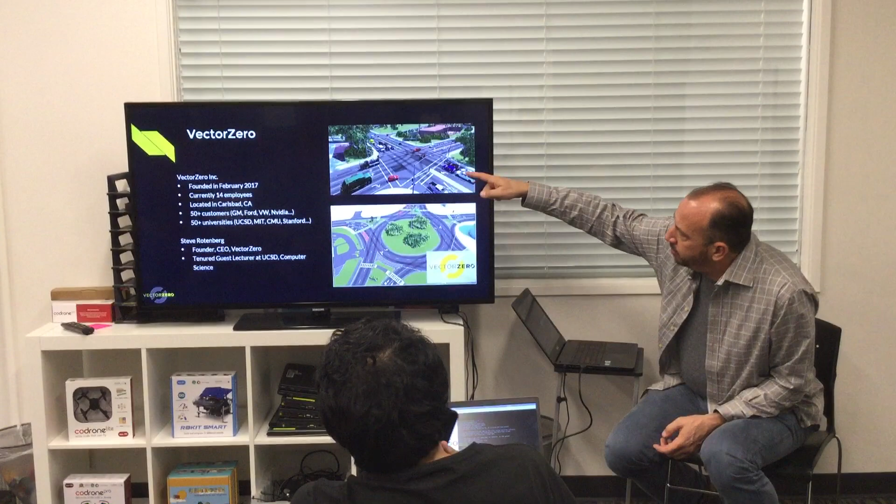So everyone in that field has come to the conclusion that simulation is going to play a huge role in this. The makers of autonomous vehicles, some of the folks we talk to, are setting up clouds of tens of thousands of CPUs running 24 hours a day, rerunning the same tests over and over and running various simulations. Several companies in the last few years have started up to address this. We're one of them, but we've taken a pretty unique approach. Instead of focusing on the simulation side, we focused on the modeling side, the preparation of the environments, and it turns out that's something no one else has put much emphasis on.

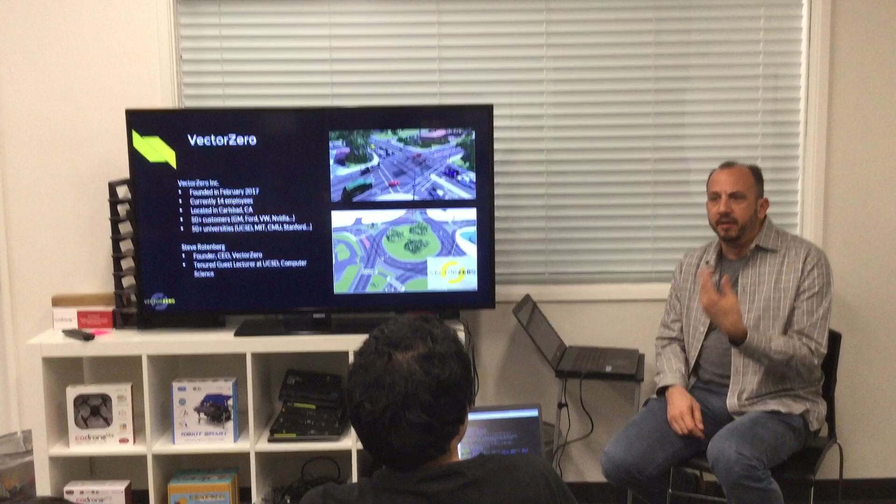In just the year and a half since we released our software, we've become the standard product that everyone is now using to build roads, to build the actual road environment. We make a piece of software that allows you to interactively build scenes like these and set them up for simulation. We started the company in February 2017, so it's not even 3 years old. We have 14 employees currently, based in Carlsbad. We now have over 50 customers in the autonomous space, including 12 or 13 of the major automakers like Ford, General Motors, Daimler, Toyota, and Honda. It also includes several big hardware companies like NVIDIA, Samsung, and Intel, all customers. There are also over 50 universities now using our software. Incidentally, I teach at UCSD as a guest lecturer, teaching computer animation programming and a physics simulation class.

These pictures show some of the output of our software, and you can build a scene like this in a couple of hours, probably. Something like this might take 3-4 hours for somebody who knows what they're doing. Our main product is called RoadRunner. It's an interactive tool that you can fire up and run, click with the mouse, and build 3D scenes for rapid road modeling and creation of the environment. It's got a very intuitive user interface, designed for ease of use, pretty powerful in terms of editing, and runs on Windows and Linux.

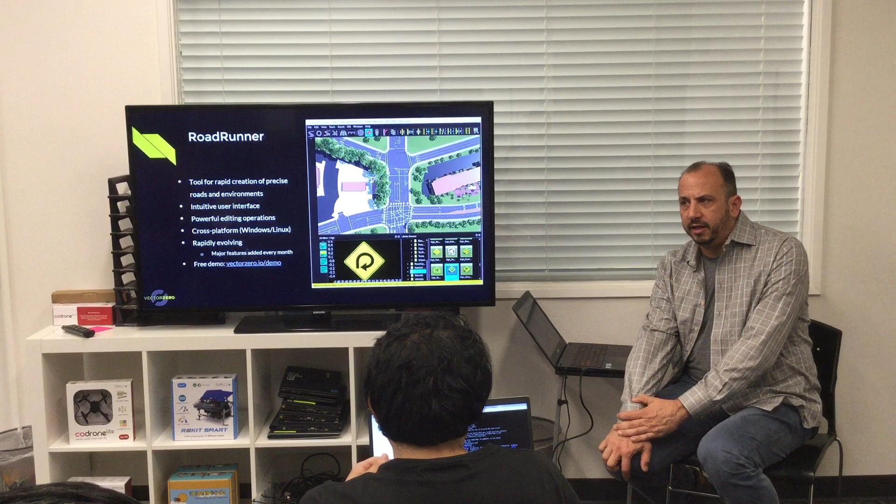We find that more than half of our customers use Linux at this point. A lot of the automotive companies are big Linux users. The tool itself is evolving a lot, and there's a free demo version available if anyone wants to check it out. The professional version is a little more expensive, but we can arrange things if you're doing experiments or research.

So internally we have a road model representation that allows us to represent very complex situations. It's designed from the start to handle very complex road networks, because we know that a simple 90-degree intersection in a four-way is going to get old quick, so we designed it with these kind of worst case scenarios in mind.

This is an actual real location: 1, 2, 3, 4, 5 little roundabouts arranged in one giant roundabout. This is in Swindon, England. Believe it or not, it's actually a real place, and there's another one similar to this in England somewhere. I don't know why they do it, I think they're just showing off. It's not even a very big town, and I don't know why they need an intersection that complex there, but it's pretty famous.

But anyway, we can not only build a 3D textured model for rendering, but the model we build has all the semantic information about where roads are, where lanes are, and where stopping points are, so it's actually a simulation-ready model.

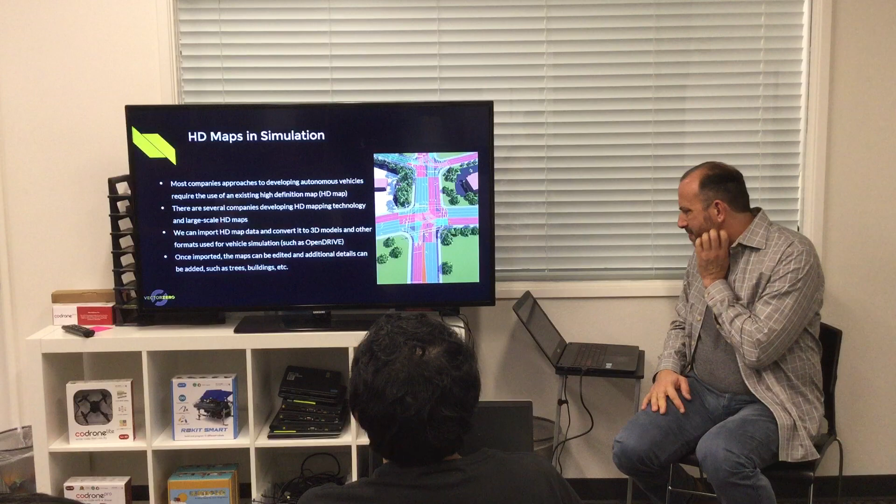Let me quickly show a video that shows some of our editing stuff, to give a live view of it here. I might skip over some of this, but I'll talk over some of it. So this shows again, it's an interactive tool designed very much to click with the mouse.

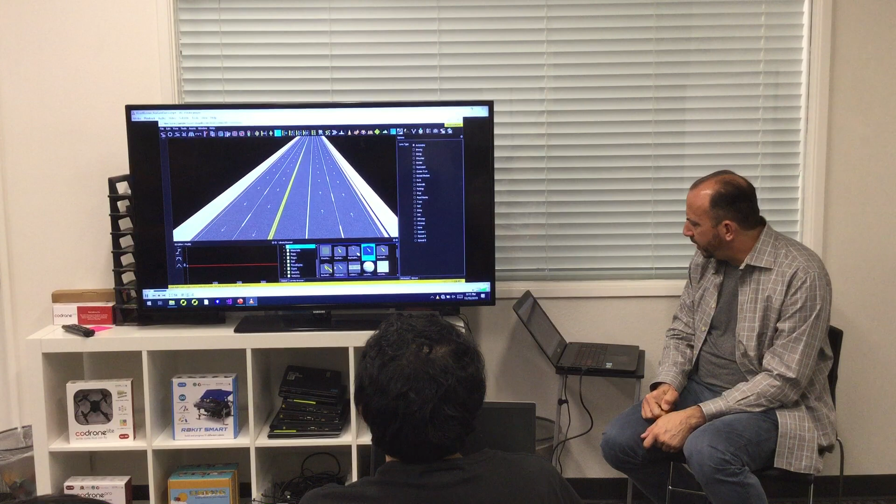There's a road editing mode where we lay out the main shape of the road. We can then go in and add individual lanes. Lane markings can be added, and lane markings can all be customized, so you can create little assets for lane marking types and customize the dash spacing, the size, the color of the markings, etc.

Everything is set up to do international roads, so it's nothing US specific - you can create your own library of road marking styles.

So you see here adding turning lanes, carving in different lanes. We can change the markings on any span independently. This is called a slip lane here, a turning lane. I've got some tools for adjusting corners. The video doesn't show much in the way of roundabouts, but shows some basic roundabout-like capabilities.

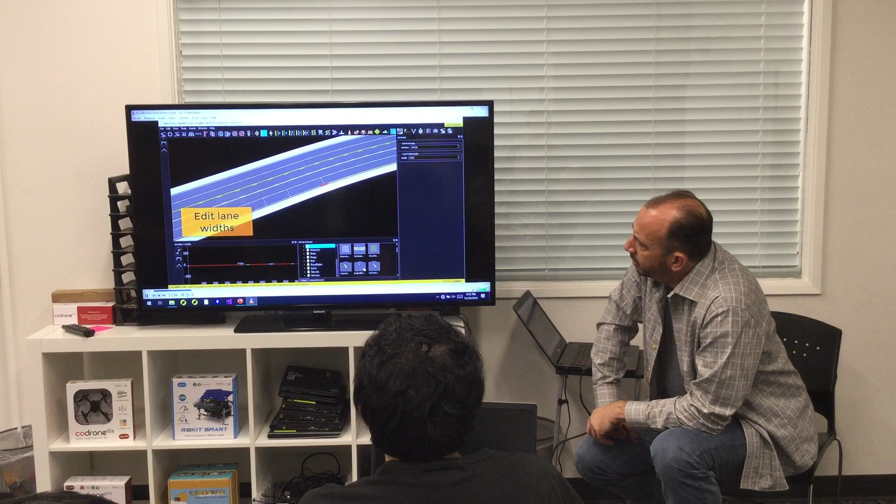The whole road is completely editable, so you can add these width markers at any point and make adjustments as fine scale or as coarse scale as you want. This one shows lane widths - as you adjust this one it maintains the same width if you want, or you can set it to not add on the width, so just different controls over that.

We have control over the cross section of the road, so you can control banking, crossfall, and the shape of the road. This system is going to undergo some improvements, but you can set key points along the road and adjust the cross section or blend between them. So you have control over all the curvature underlying the road. Real roads have very specific curvature requirements in how they're designed.

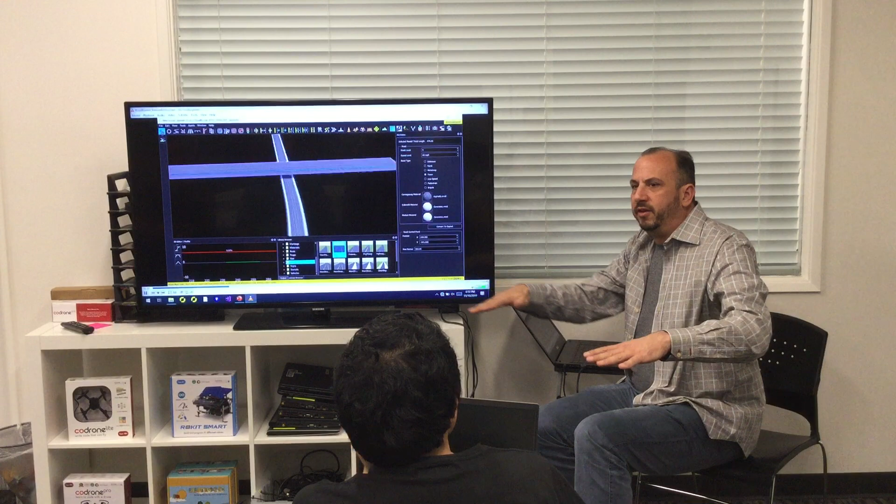We control the vertical heights of the roads as well, and the vertical shape of the road is based on the same types of curves and engineering principles that real roads are designed with. Obviously no one's going to build a real road like this, but the types of curves we use are all based on actual road curves. So the horizontal, top-down view is designed independent of the vertical profile of the road.

This is showing some of the bridge capabilities. We're doing some improvements here, so we have more control over intersections on bridges - we don't have good control of that right now. We're adding tunnels and better bridge control.

Posts, things like this can be brought in, customized and adjusted.

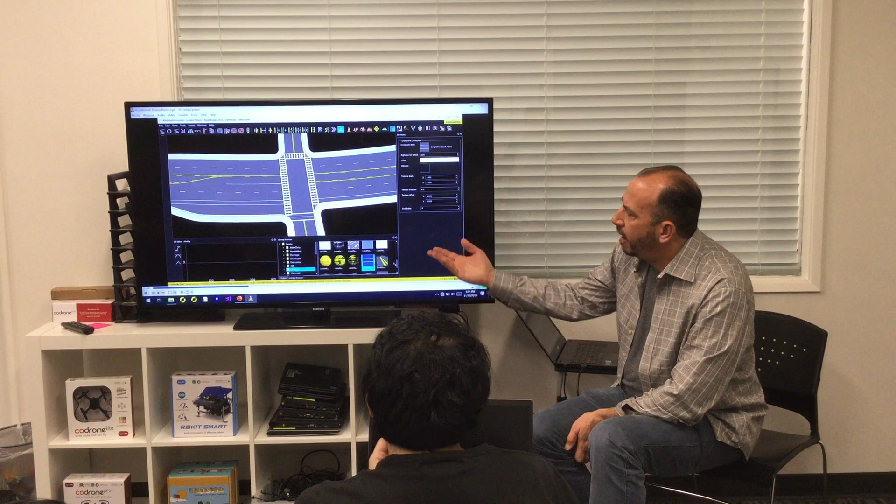And this shows the level of control over road markings - different types of marking, crosswalks. Again these are all based on styles, so you can create your own library of crosswalk styles and adjust the dash sizes, the colors, etc.

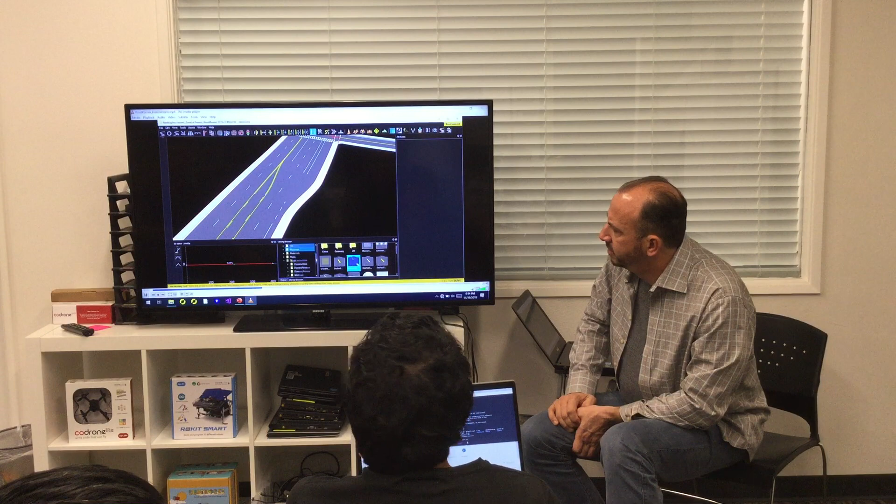These are a bunch of stencils we can place on the road. They're just SVG files, but they could be image files or bitmaps as well. It's not too hard to find the proper SVG shapes for all these, since the U.S. Department of Transportation publishes files that have all that.

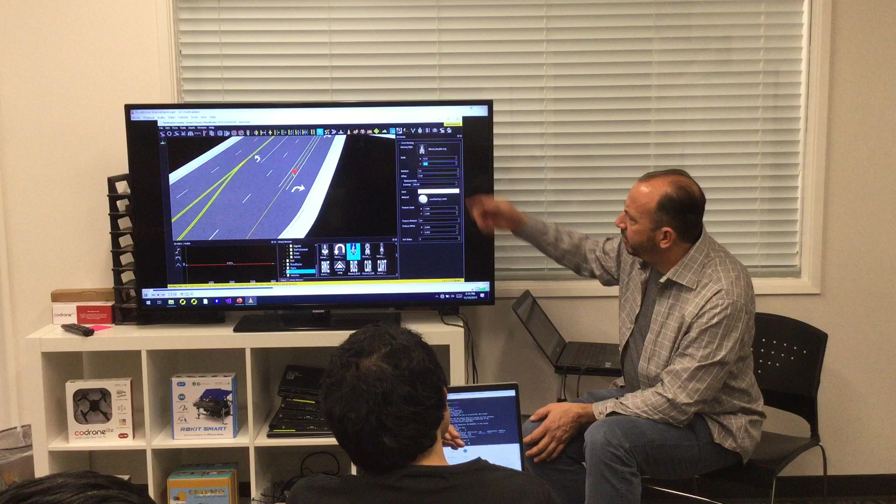You saw a second ago control over materials, so we can make the paint look faded. If people want to use this to test computer vision algorithms, they sometimes want to verify that the car will drive on if the paint is all chipped up. We can add things like dirt and cracks and more visual features if desired.

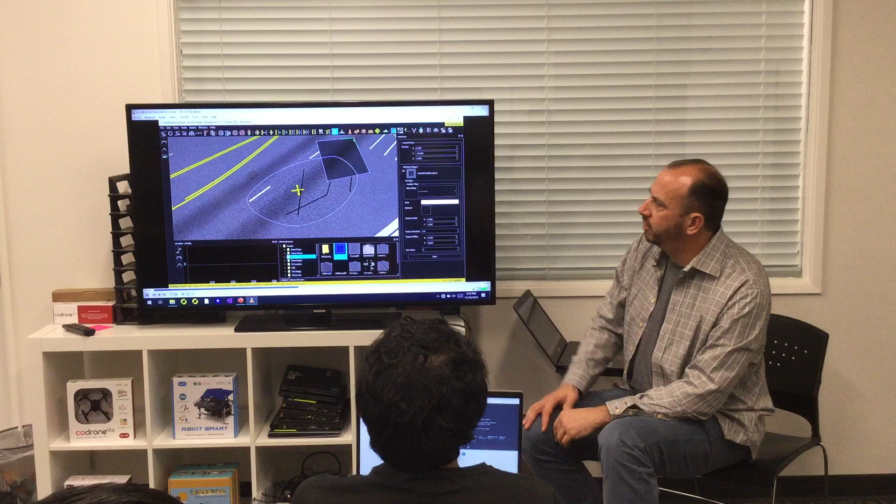A fairly small number of our customers really care about high quality visuals. Most of the customers use the software for creating road networks for path planning simulation, not so much for perception simulation, if that makes sense. I can get into that detail more if you're interested. A lot of our customers care about having a road network with the lanes and geometry set up. They tend to be, at least currently, less concerned about these finer scale visual features because, like I said, fewer people are doing perception simulation with it.

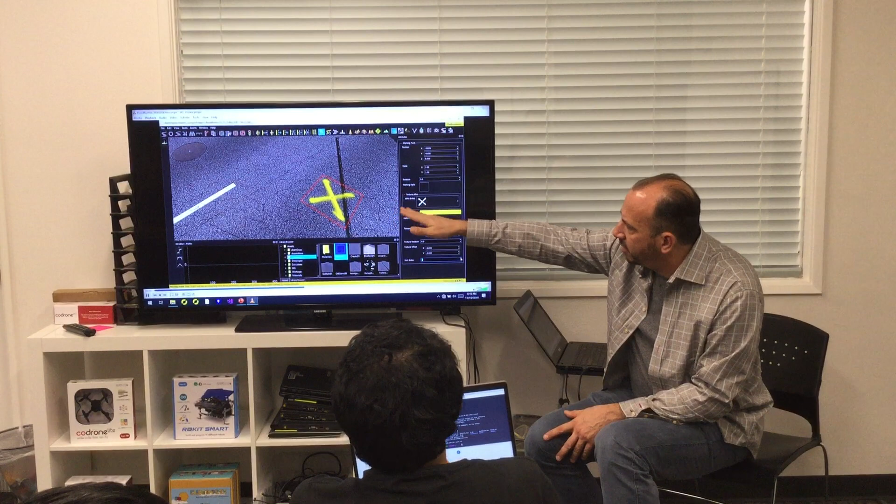But this shows how we can control all these other layered things on the road, and we can control what's drawing on top of what. So pretty detailed control of markings and stuff.

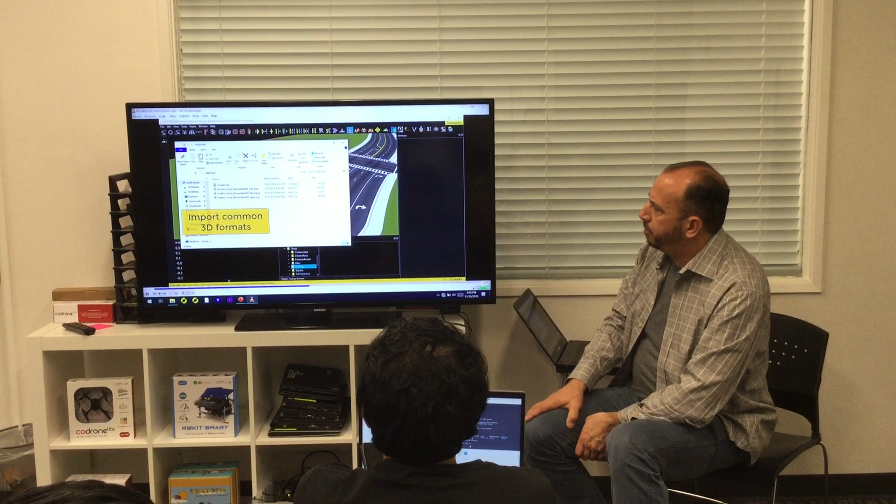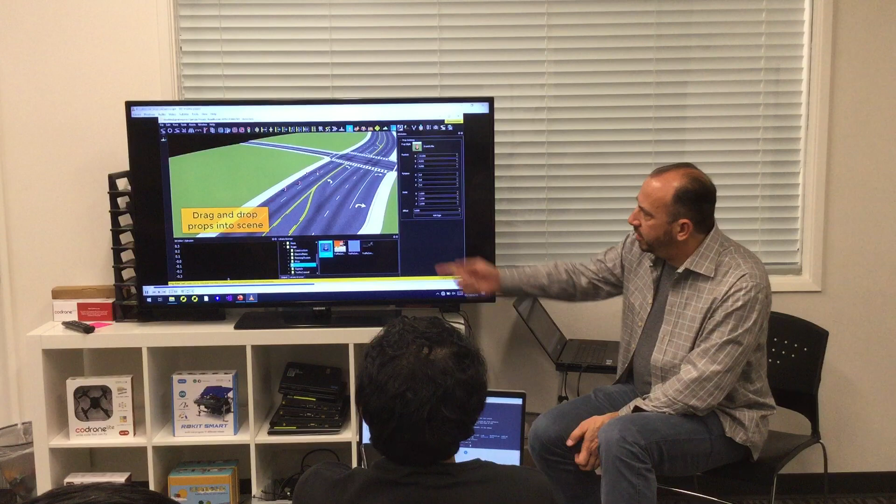The prop system allows us to bring in 3D files from other 3D modeling tools. If you're familiar with tools like Blender and Maya, we can import any 3D shape from there and just place it as what we call a prop. So a prop is just any external file, like trees and buildings and such.

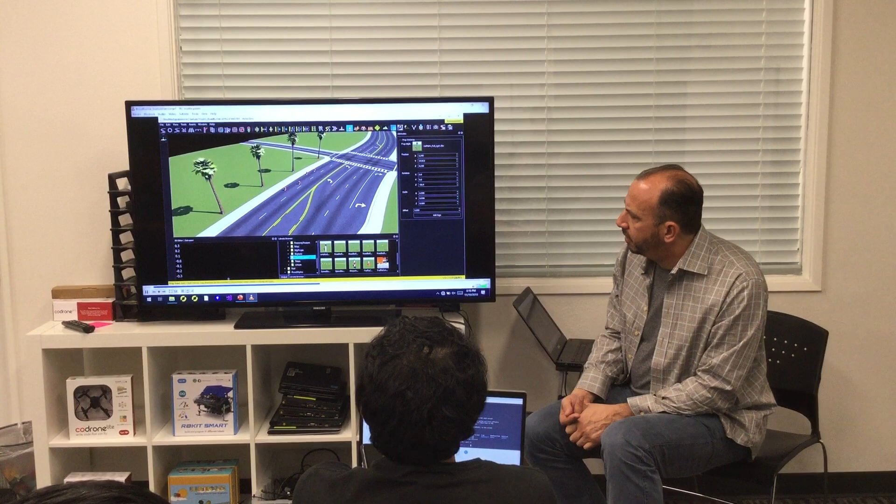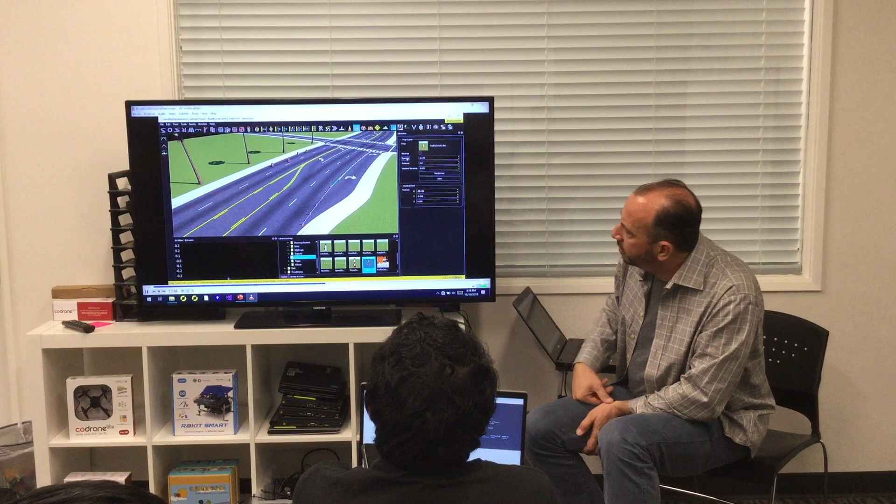We also offer a library of several hundred standard props and prop tools. This shows some of the ability to place things along curves and add some randomization, with different rules for placing things. You can place props on curves, you can draw a polygon and fill in an area. Throw in a cow here and there.

Like we were building a large scene for one of our customers, who had this big test environment that they built. We were making a newer version of it, and looking through it we found they had UFOs hiding in there, and the Loch Ness Monster somewhere, little things like that.

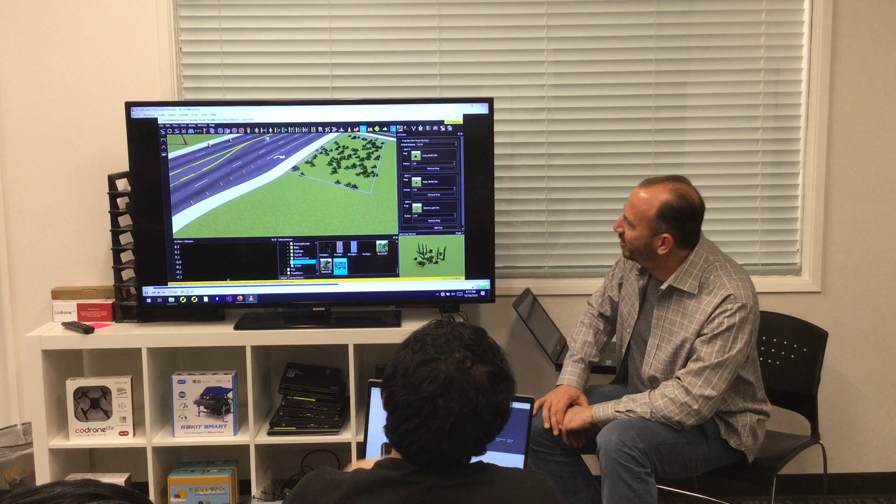This shows we can make random prop distributions, so we can say here's a set of different trees, and it's going to be one-third this type and fifty percent that type, controlling the proportions.

Anything for weather, like snow? We don't focus on that. Typically snow and things like that are added in the simulator afterward, so we generally focus on building the static environment. As we get more into the simulation side as well, I could see us adding more capabilities like that.

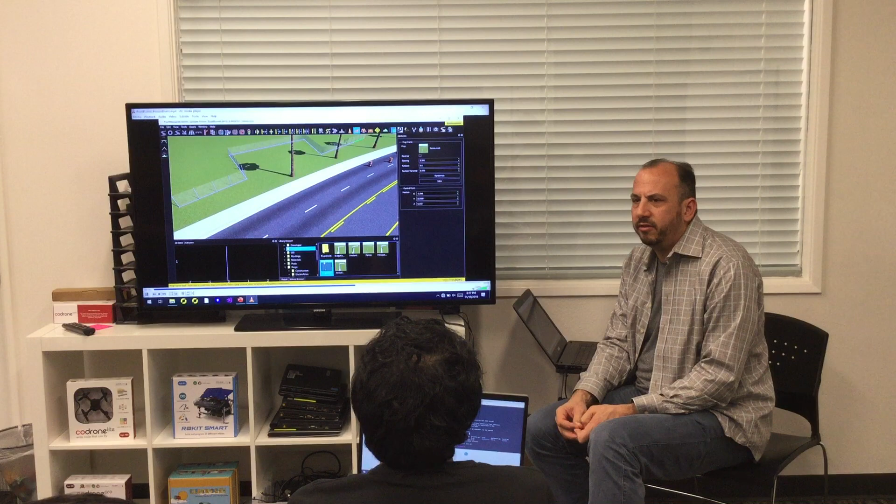Typically the output of our tool is a static model that would then be brought into something like Unity or Unreal. Then you could add all kinds of other dynamic effects like wind, weather, snow, and rain.

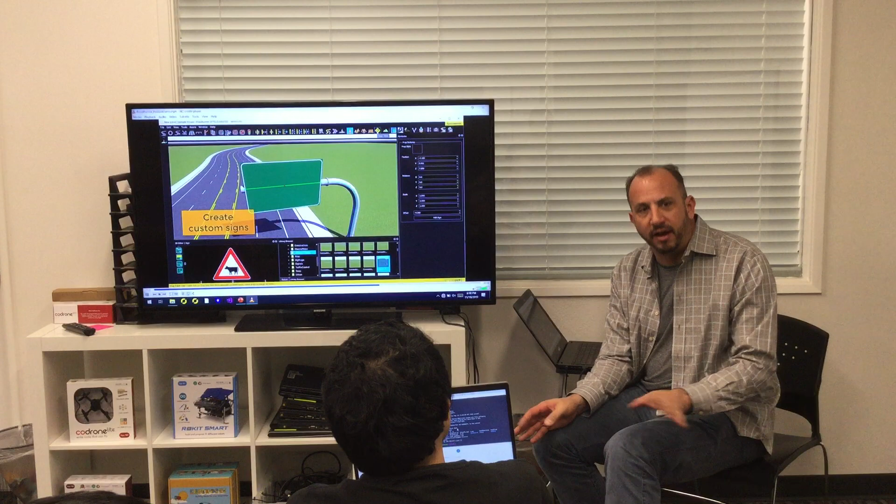So speaking of outputs, is there a standardized method? Yeah, there's a road map format that's pretty standard called OpenDrive. I'd say about 75% of our customers use it. It's a tough standard to work with, and we have probably the best tool for editing that standard, so anyone even trying to use that standard ends up using our software because it's so tricky. It's also under active development, but by active I mean very slow. More meetings than actual changes. A lot of companies are involved in it, so it's kind of a slow moving process.

But also we output 3D geometry to various standard 3D formats like FBX, and we can directly output the 3D geometry into something like Maya or Blender, typically through FBX, which is the most common.

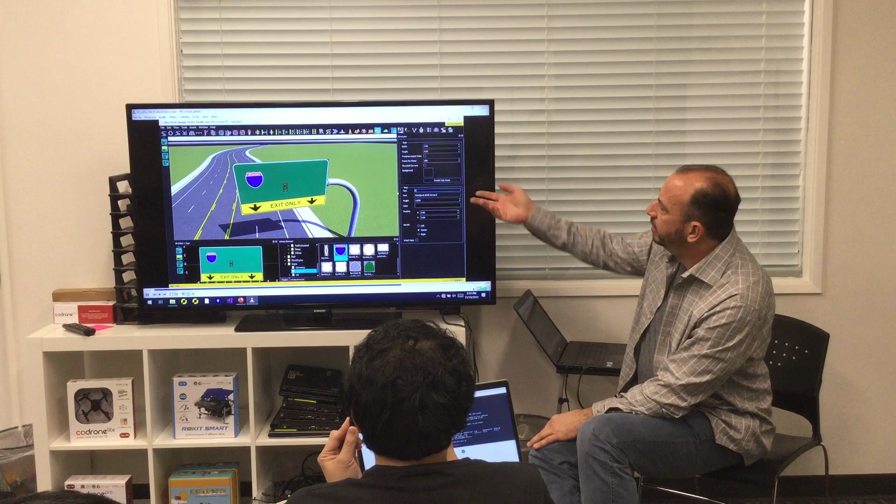And then this shows the sign editor, which is all in the tool as well. You can type in strings, add fonts, and add graphics. This is also very international, so it can handle Chinese and Japanese characters—it's all Unicode, so whatever you want to put in there.

I think this shows, jumping ahead a little bit, that you can cut and paste in Unicode strings.

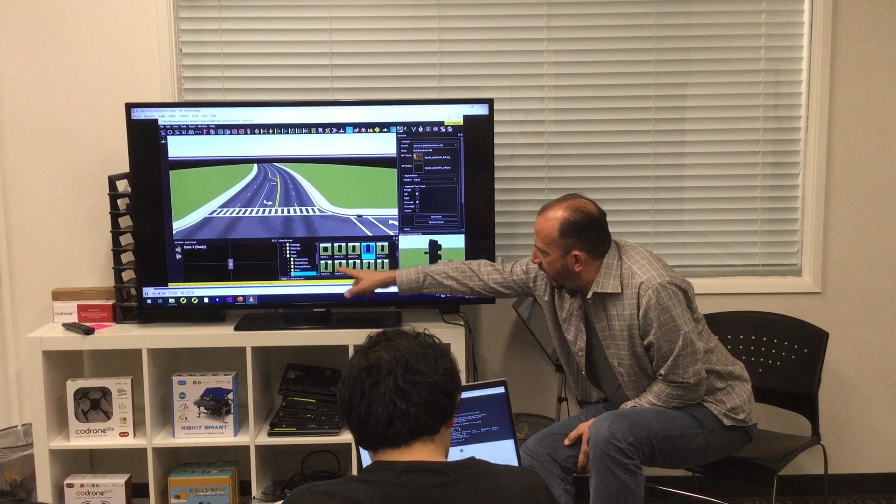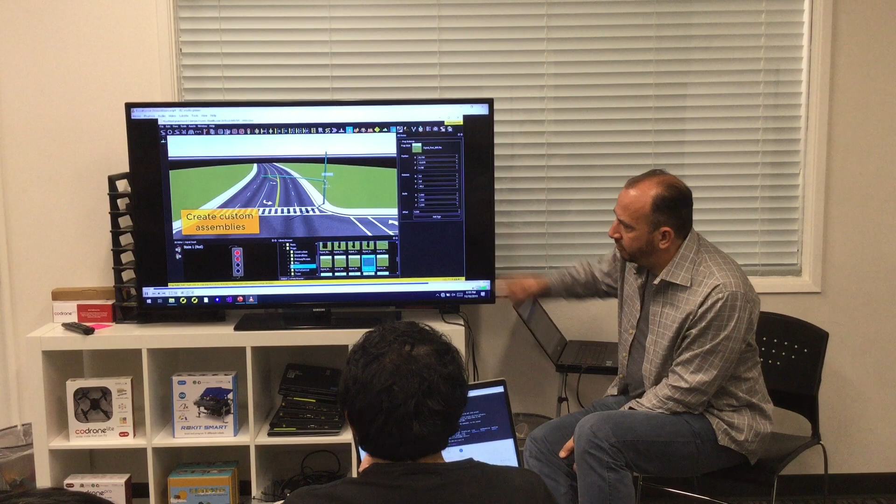This shows the traffic signal system. We have our own library of signals, but you can add your own and add different signal types. We can configure it so every single bulb can be individually set, and this is just from another file, so you can create a texture that has your different bulb types.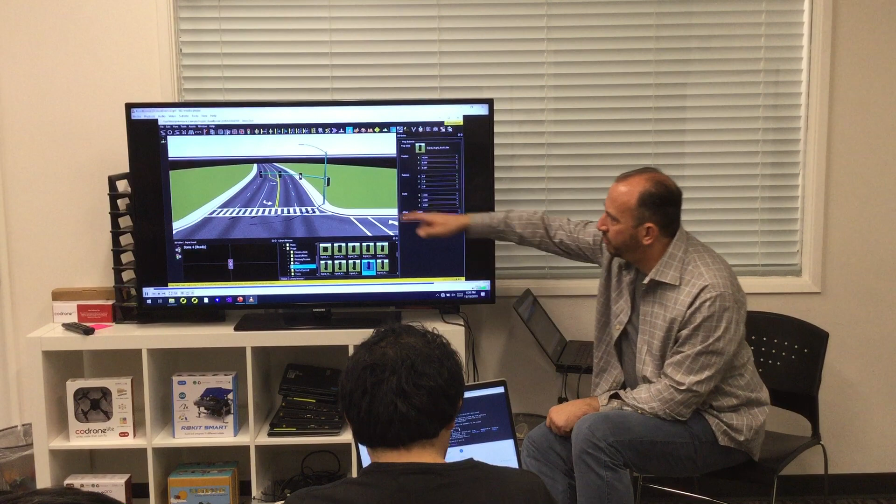You can then very quickly snap together these assemblies, we call them. Objects are built to be attached together, so they have these curves inside them that are attachment curves, so things snap real quick.

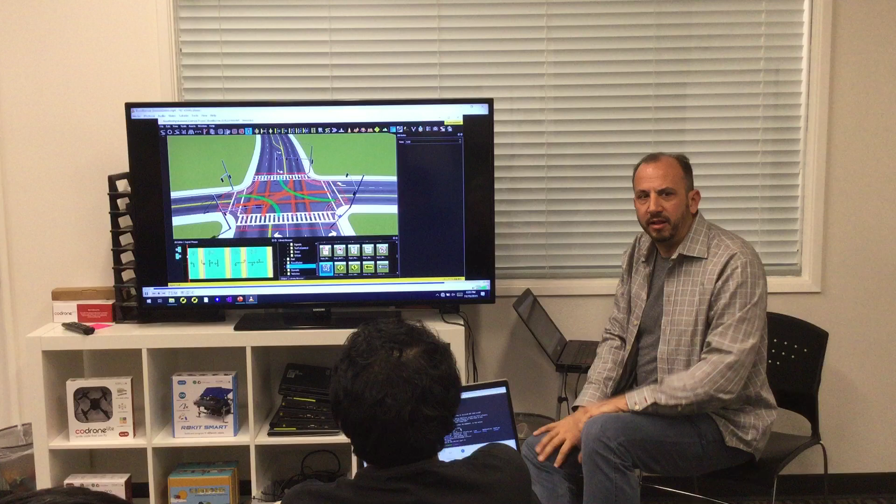You can build a custom set of signals very quickly. Then we have a tool for signalizing, which controls all the phasing and says, okay, these guys now have a left turn, now these guys get to go straight, etc. That's completely editable. Everything in the tool is very editable, so you can always go in and set any individual pathway to be whatever you want, but it also has some nice higher level tools for just give me a standard left turn, protected left turn, or permitted left turn. It automatically configures all the bulbs if everything is set up correctly.

Now I'm scrolling through, and I show that these left turns are kind of close to each other, so we're going to split this phasing out, and we're going to have a separate phase where these guys get a green light, and then a separate phase where these guys get a green light. That shows the ability to build a custom set of phasing for the intersection, and again all the bulbs automatically configure.

This shows actually running a traffic simulation on it. We do some simulation work here, but that's not really a part of our product yet. The product that ships is just the static environment modeler. We're working on tools for doing traffic simulation and scenario simulation as well, but in the meantime we're compatible with a lot of other tools out there that do this side of things.

So yeah, that's a quick overview of the feature set. I'll go on through a couple more slides.

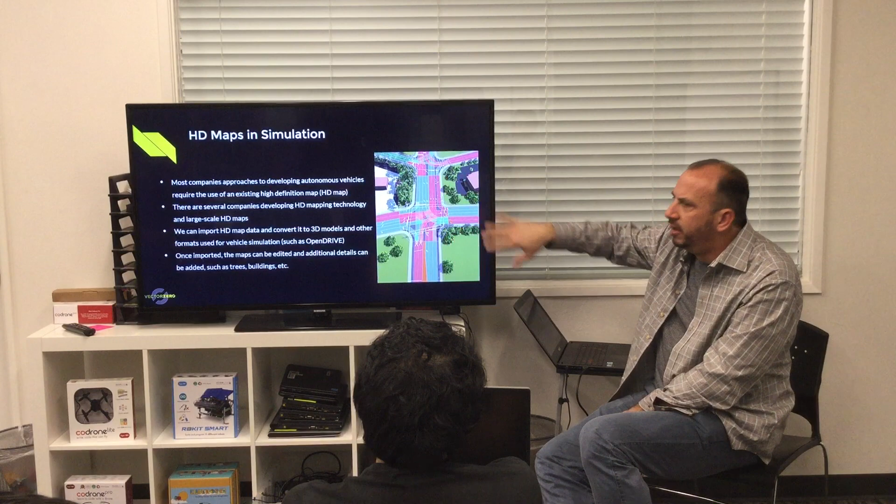One of the things that video doesn't show is there's a lot of mapping companies out there. Here Maps is one of them that drives vehicles around. They have a fleet of 50 or 100 or more cars all around the world, and they drive the same roads over and over with GPS, cameras, and LiDAR. They extract these detailed maps, kind of like the red and blue and green strips you see under here, that have detailed lane boundary information, very geometrically accurate, with road heights and road geometry, within a few centimeters of the real world, depending on how accurate their GPS happened to be when they were driving it. They produce these semantic maps of just the road information.

We can import that and turn it into more of a 3D map. So we can bring in these kind of simplistic ribbons and turn them into actual roads, and then either manually or automatically add signs and signals. It depends on what's in the map data.

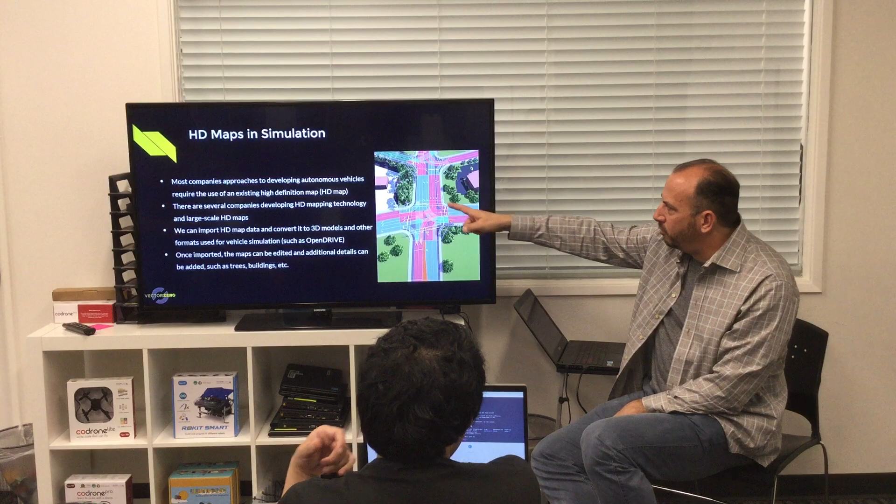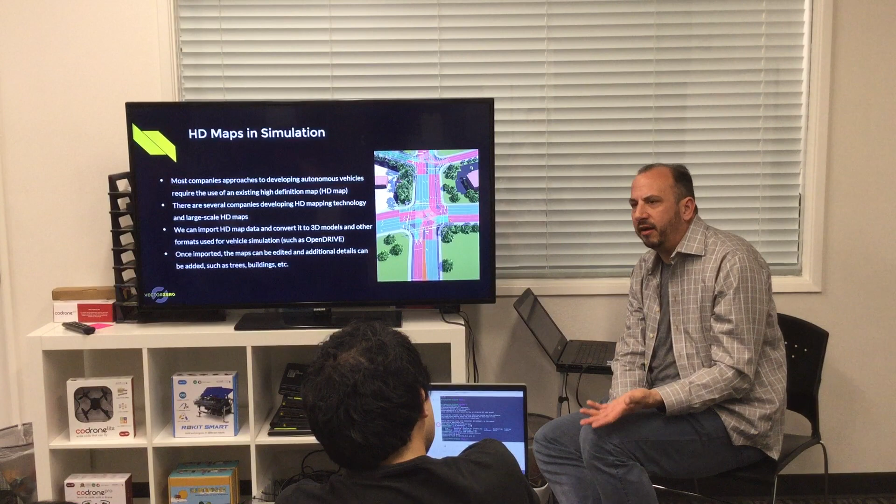Some of these mapping companies actually will map out every single signal and tell us, we'll be able to just get a file that says where every bulb is. But typically they won't tell you where the trees are, or where the posts are holding up those signals, so we'll just get these kind of floating signals in the air. So that's what we find: there's some great map data out there that may have very accurate road information, but it's not going to have everything.

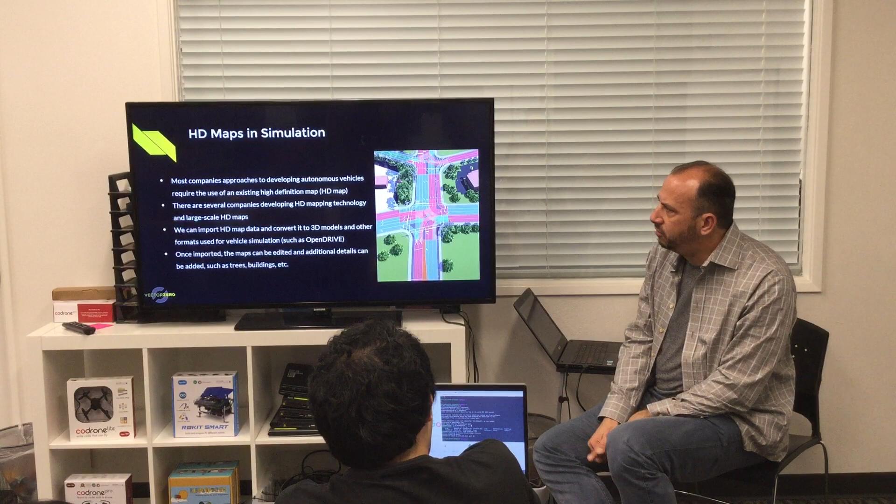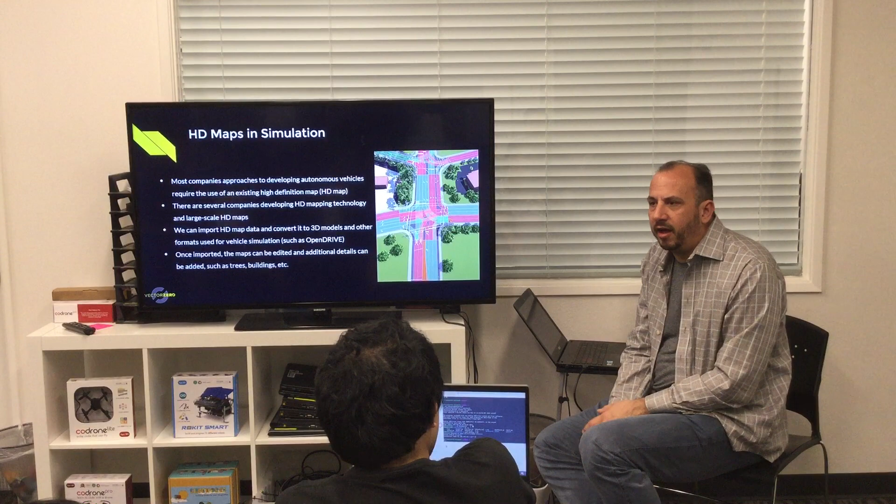So when we actually go to build a real location, we often have to bring in lots of different data sources. We might bring in one of these HD high definition maps from Here Maps, but then we might also bring in an aerial image taken from an airplane, or we might bring in ground level LiDAR or other types of data for that area to help us as visual reference to then build on top of it.

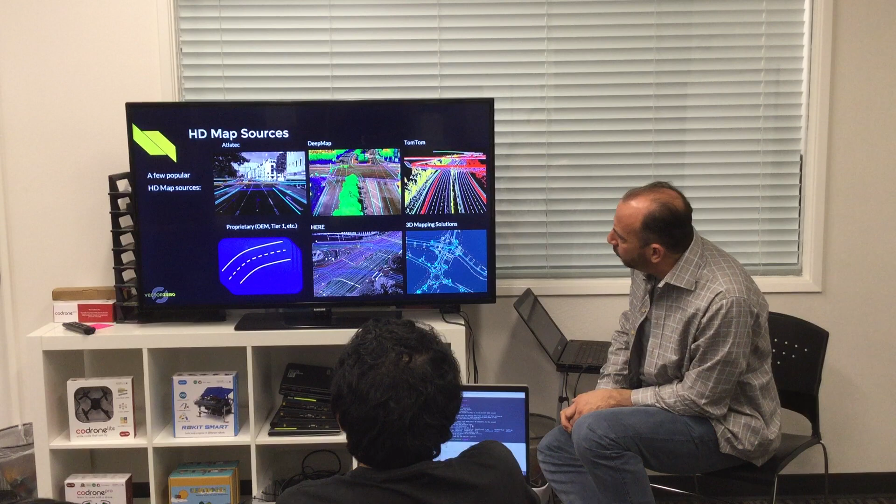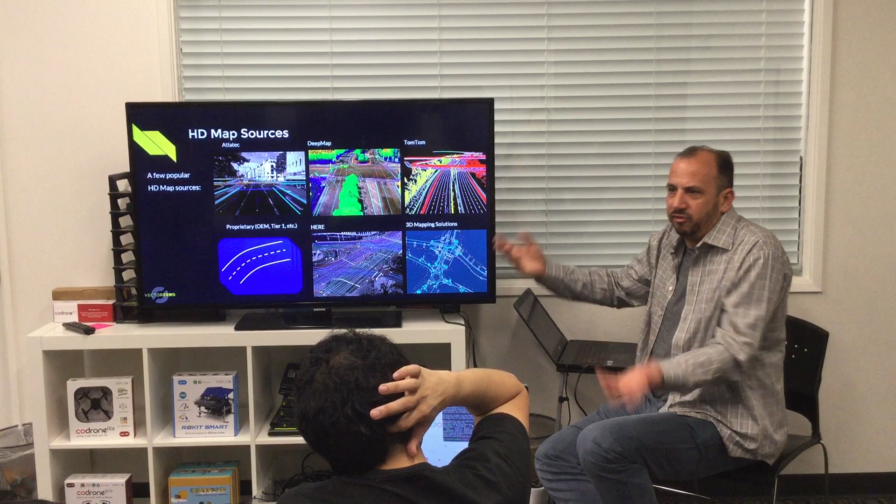These are just some pictures that show some of the data out there, from several different companies we work with that collect map data. This is kind of the data you might get: these lines are very accurately positioned, but they're just lines, right? You can't really drive a 3D simulation on that, so we have to bring this in and turn it into actual roads. These are again some of the partners we work with on that.